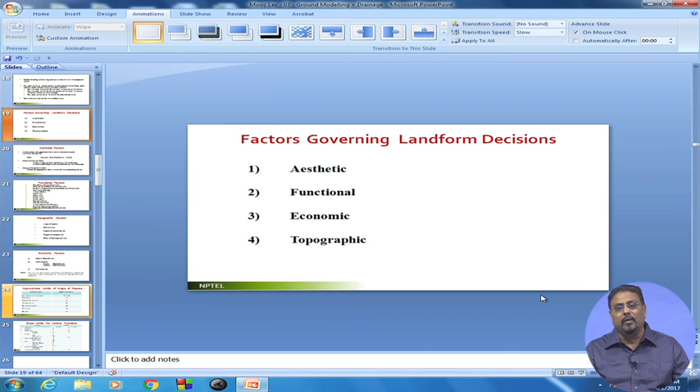First is the aesthetic, next is the functional, third is the economic, and fourth is the topographic. Here again I will put the note of cautioning that you don't try to prioritize which one is most important, which one is the first. But one thing is very true, that since it is landform and dealing with the soil, whether it is functionally good or bad, aesthetically good or bad, topographic matter will definitely be one of the prime concern.

And since landform means you are changing the profiles with the topographic factors, then naturally economic factor also will be very important. Very bluntly saying, you have a landscape project to be designed which has been commissioned by a client. It has some topography which you want to change. That means you want to do the landform work.

The moment you do that and you explain this pictorially to your client, he will be very happy. He will say, yes, wonderful, you please do that. And then you painstakingly work it out, estimate the earthwork, estimate the costing of it, and then you go to the client back and say that okay, it's going to cost you about say 30 lakhs. Client will say, dump it, don't do it, don't have to do anything. I cannot spend 30 lakhs just for changing my levels. This is the irony of these projects.

Okay, the point is, let us try to understand these factors very briefly. How you handle it and what will be your fate in front of your client, that the time will say. But let us think of it technically and also ideally. What is it? Which factors are going to govern when you are going to do the landform decisions? I have listed this in this form, so let me go by that form itself.

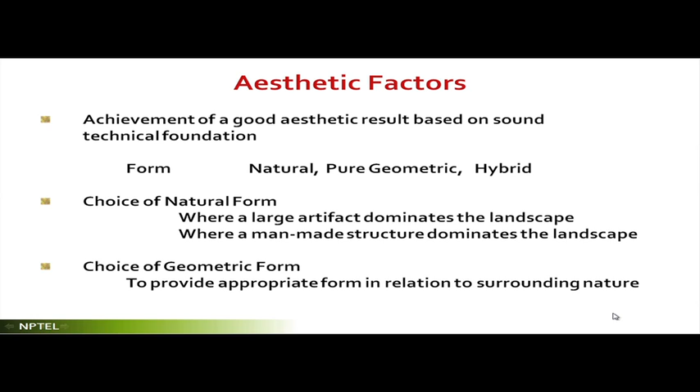Aesthetically, if you look at it, basically what happens is any landform work that you do, it must be based on a good aesthetic, based on sound technical foundation. It should be absolutely technically, geotechnically correct, whatever goodness it is we are going to give. So you are definitely, and also I can tell you, if something is technically perfect, it also is likely to be good looking, and this is phenomenally true for anything.

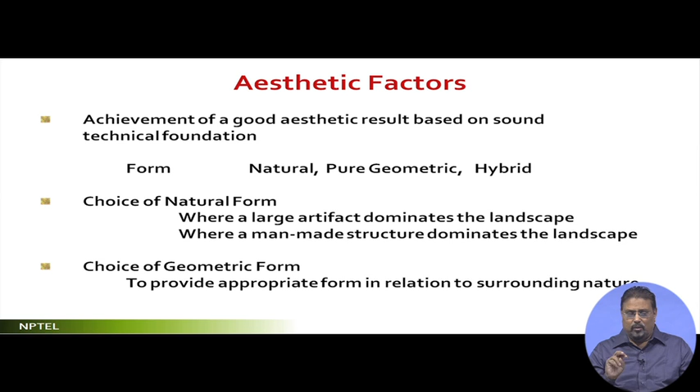Here actually in aesthetics what we are referring to is the form. There are three kinds of forms, two basic kinds. One is the natural form, that means the profile is curved. You know, whenever we try to explain, we say something which is curvilinear. These are natural forms. And something which is geometric, which you try to make it, which can be explained through geometry. This is geometric. Whether it is truncated pyramid, whether it is truncated sloped pyramid, whether it is a cone, whatever, which can be represented with geometry.

Now the question is, this one that I have drawn, which I am saying natural, can't this be geometrically explained? Yes, it could be, probably, because if suppose you make such geometric figure where it is absolutely paraboloid, half of the paraboloid, then it is geometric, no doubt about it. But the mind and the eye generally perceives this as non-geometric, so natural. And then if it is something like, if you make a pure paraboloid section over here, people will always understand, yes, this is geometric. The moment you round up this particular basis, then people will start thinking it's natural.

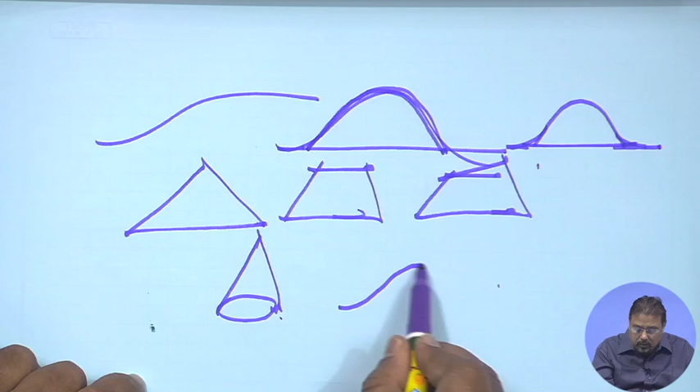So this natural and geometric, let's try to see with respect to perceptions. Some form, landform, which is very geometrically representable are geometric forms, and some forms which are maybe geometrically representable but perceptually it is profiled, then it will be natural. This is a point, let's stick to it. And there could be hybrid.

What is that hybrid? Is something like this. There may be a form which you have generated where you have gone like this, natural, and then straight down here, geometric. This is hybrid. Where do you see this? In nature has created this kind of thing. I can cite you an example. Nature creates this. You go to the sand dunes, go to the deserts. In the deserts you think that all the sand is something like this.

Go and see this - if this is the windward direction and this is the leeward direction, you will definitely find that the moment this sandbar increases in height, at one point of time it becomes a profile like this, what I have drawn. This becomes geometric. So the idea is that geometric or non-geometric, it's a matter of what you want in your project. It's a matter of choice, what you are choosing.

I can tell you one thing, that by phenomena, users are always very much fascinated by natural forms. They expect a natural form in the site. In the landscape, which is supposed to be a replication of nature to a great extent, the expectation of the user or the landscape connoisseur is to see more of natural forms. The moment you start making geometric forms, they try to correlate with the geometric forms of the buildings and other building elements. So it is your choice how you do it, but there are certain rules - or I won't say strongly that you must do this.

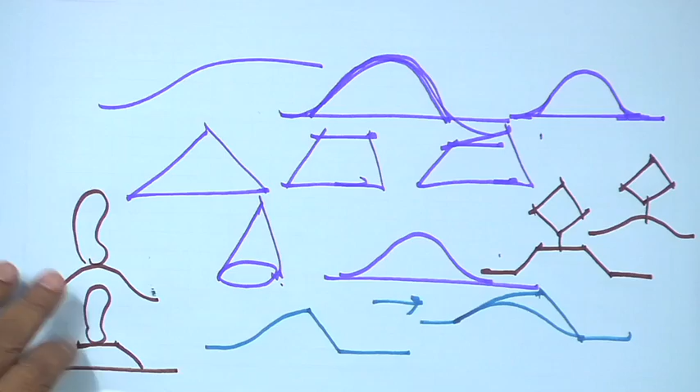...and you are trying to place it over a natural form, generally I won't say it's conflicting, but people would have preferred that accentuating this with another natural form is not very positive. So what is preferred is that you place it over a geometric form - it gets accentuated, it gets more focused. This is a very common thumb rule which you can use, now you decide. I won't say this is a very strong recommendation that you have to follow, but this is what we have understood from people's perception.

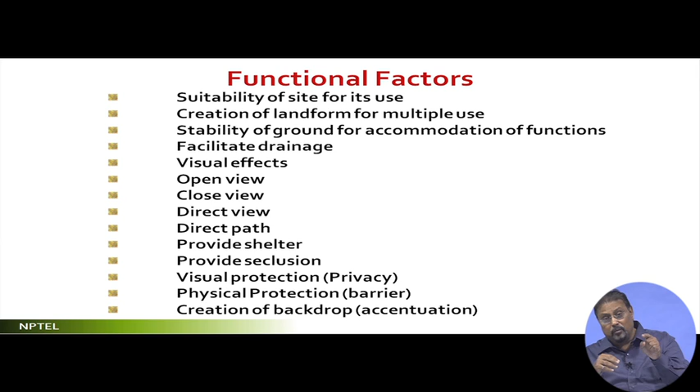The contrary to this is closing view. If suppose you have some site from where you have an unpleasant visibility to something which is not within your site, and you want to stop it, or maybe within your site but non-conducive from this particular side, then you make a mound to close it.

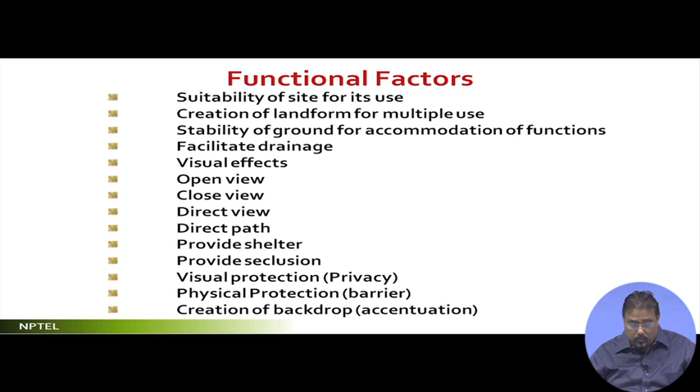Directing view is when you think in this term, drawing in plan. The mounds are, suppose you keep on making mounds like this, and now you put somebody at this particular point to view it and try to see what will happen.

The person who is seeing this in plan will see the projected surface of this and this, and also the projected surface of this. The moment it is generated in the image of the person, automatically the whole view is being directed by obstruction of this. So if I try to take a test of people on their perception, they will say that when they were looking at it, the whole thing appeared to be directed towards this. So this is directing view.

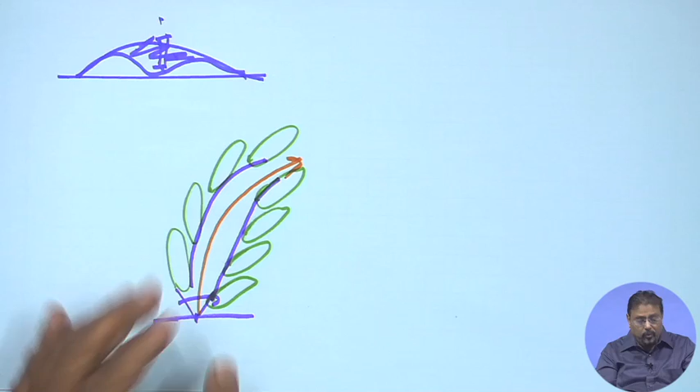Now take the same thing for directing path. Here, the moment you find that the mounds are turning like this and this, and the other mounds are turning like this and this, automatically you will conceive or perceive that there must be a path leading to this. So directing path, directing views, closing views, and open views are all functional aspects of the landform.

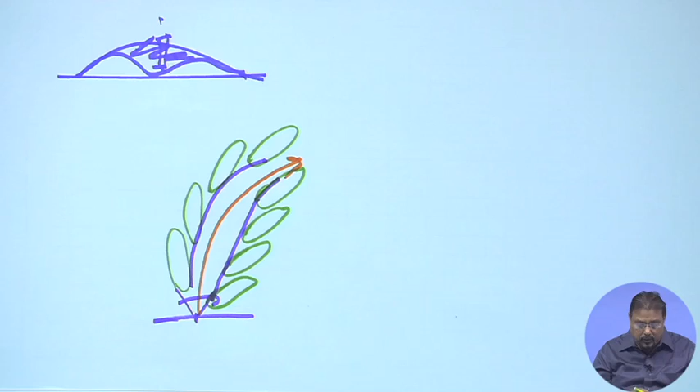Provide shelter is essentially this. I will try to cite in another way. What happens is, if somebody is standing here with nothing around, he has to have a feeling of shelter. The best possible way is to have something above - remember the behavioral things I was talking about. If this is not possible, then something on the side.

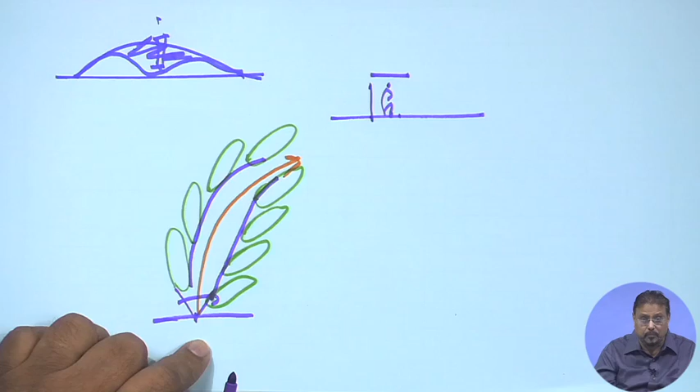If this is not possible, maybe a mound. This will work, this will give a feeling of shelter - that means I have a shelter to fall back on, but actually it is sloping upward. Still the mind perceives it like that, remembering the sensation, perception and intellection process in which the user perceives this as one form of shelter.

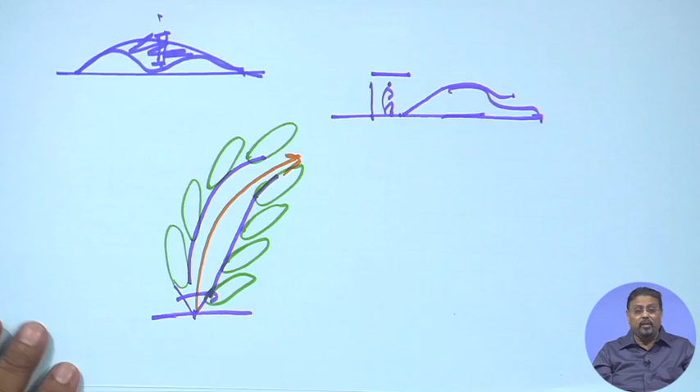Then provide seclusion. When you have one function here, another function here, and you want to make a separation between them, you can always create a mound in between to seclude simply. So these are all different functional aspects of it.

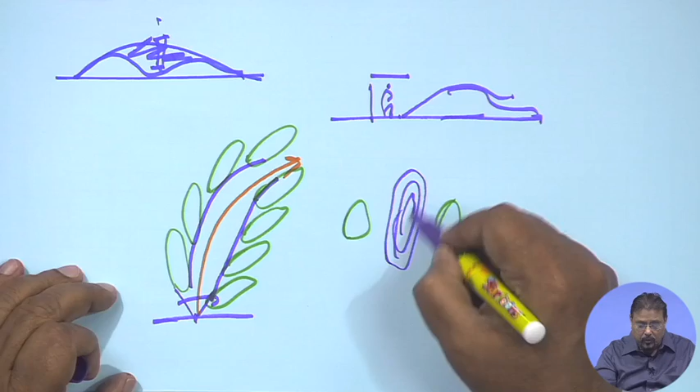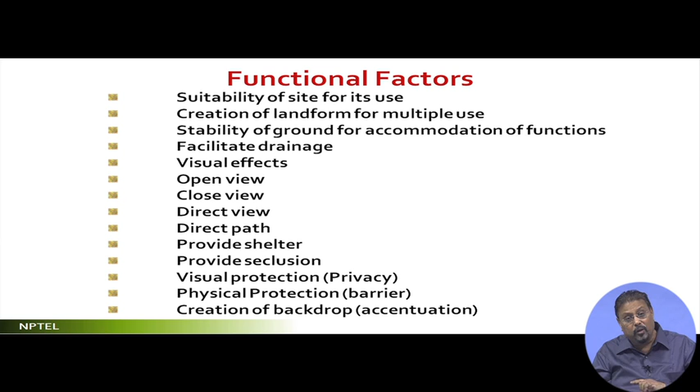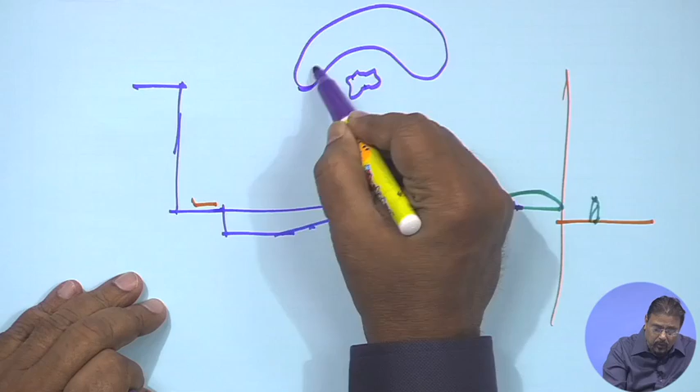Physical protection as a barrier means you are now making the mounds as a barrier, so that you cannot cross over. And creation of the backdrop, which is something like this, when you have some objects over here which you want to highlight with the mounds. I am always citing this landform as mounds here because that will be best perceived like this.

With this, the moment you look at it in a view frame, you will find that this is the object and then there is a mound at the back. This gives you a kind of backdrop which accentuates. This is how you have to look at it in terms of the functional factors. And once you understand this, you can always also start analyzing different examples that you are seeing yourself around you, which I am not being able to see. So you try to correlate this with respect to that.

Next is the topographical factors, in which few things are very, very important. One is the angle of repose. Angle of repose is the angle that is being generated between, suppose, the best way to understand this, if this is ground and you pour the bulk material, the loose material, you keep on pouring. Once you start pouring, you will find that this is going to take a shape of a similar kind of geometry. And if it is loose materials, by virtue of the size, volume and the profiles of this, automatically there is a generic angle that is created, and this is the angle which is the angle of repose.

The best way to understand this is, have you seen the sand clock? In a sand clock, you will find that from the top ball the sand is falling in a line and it makes a sort of cone at the center, and you measure the angle between the horizon and this, and turn the clock and see again, it is again making a cone, measure, it will be identical, and this is a phenomenon. So why you have to understand angle of repose here: because in case you are using bulk materials or loose materials, the angle of repose will be very much active, very much required.

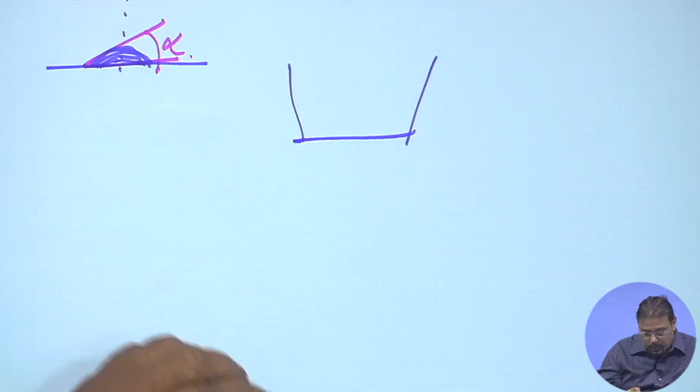Then degree of consolidation and compaction. These two I always discuss together for one reason. The degree of consolidation is basically a natural process of consolidation. You remember that I said the composition of the soil, which has the water, air and all. So in case you have the soil, let me take a bucket within which let me put some soil. Okay, loose soil, just pour the soil, it is filling it up here. Let us take the organic component, that 5%, as an integral part of the entire mineral. So I have three things now here: the mineral component, the air and the water.

Okay, now you allow it to be consolidated by its own self weight. Now this will have water and also air. Water is trying to replace the air. So once the water is trying to replace and doesn't get any egress out, this air will be trying to come to the upper level, and then after some time it will just come out. And another thing is, suppose you give heat to this, and you will find that this heat is heating this particular surface, and by conduction this heat is ultimately transmitted to the end, then the air in between the air spaces also will come out, and also the water will evaporate.

So when this thing is happening, the water and air is trying to escape from this. And secondly is the self weight of this particular material, one layer over the other. So the first layer, second layer, third layer, if you start putting, I am showing you into a basket, but in the real scenario it is naturally being done. First layer you put, it will leave it for one season, the rainwater will fall on this, and the air temperature or the solar radiation will evaporate the water.

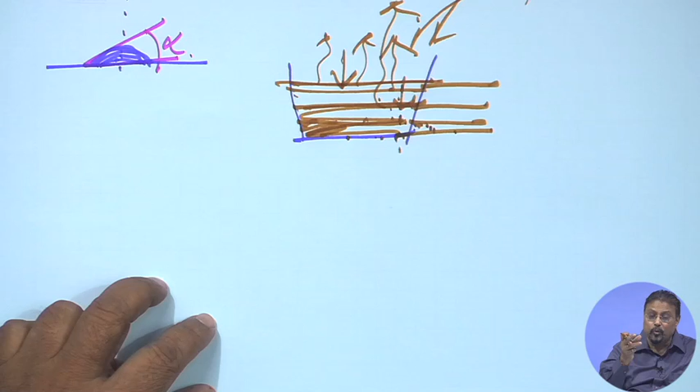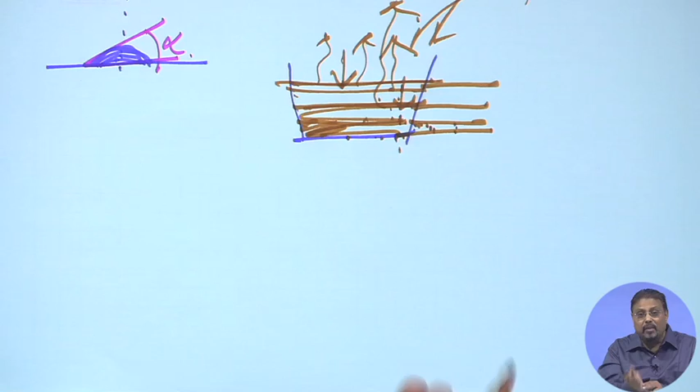And once the water is evaporated, then the air spaces are there, air voids which are being created now will be displaced with the higher heavy particles above, and that particle will now displace all these things. And once the particle is displacing, the air is coming out, so it is now filling up all those interspaces naturally in the natural process. Then when you are putting the next layer, the same process is happening over this.

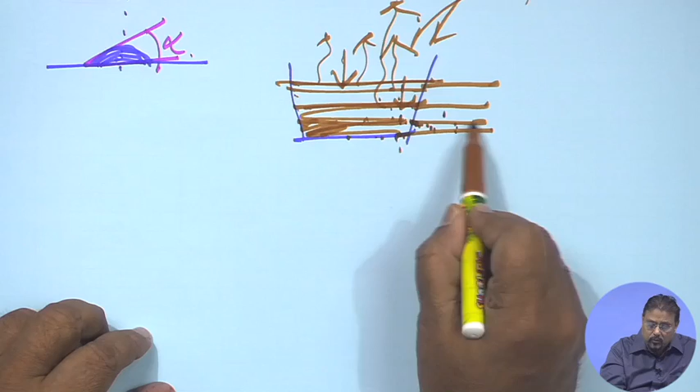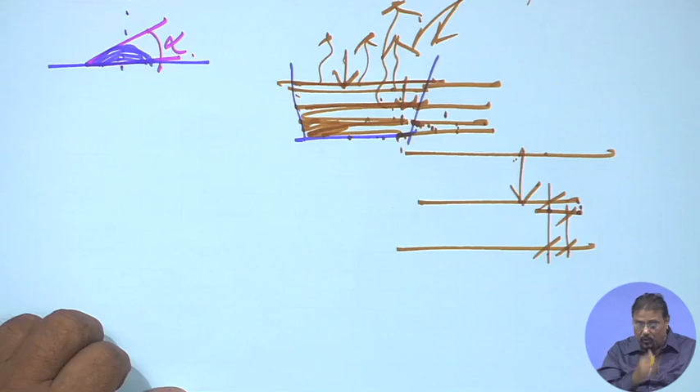If suppose originally you have found that this particular layer was of this depth, and if you could measure, then when you are putting the next layer you will find that the depth probably will be reducing a little bit. Now this is the displacement which will take place because of the additional weight that is coming over here, because this is no longer susceptible to any kind of evaporation of the water, because that has happened already. Now this weight is going to reduce here.

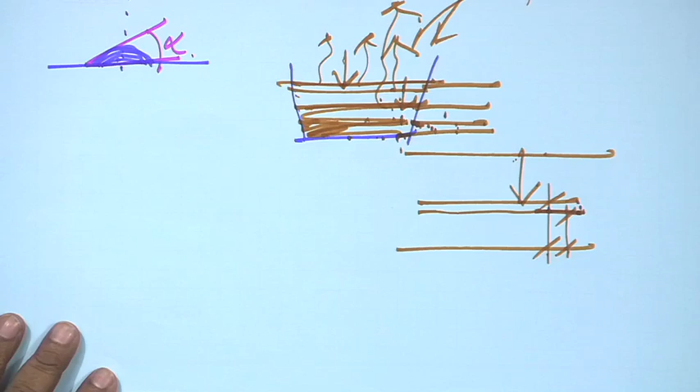So what happens is, if you are working in the profession, you must have seen that when you take earth fill or sand fill or such kind of filling, you try to measure the volume in its consolidated position. If you take the volume in the loose position, then you are a loser, because you want to fill up this much, and from the supplier you got so much of volume, and by consolidation this is going to reduce, so you could not match the volume that is to be consolidated, so you are a loser.

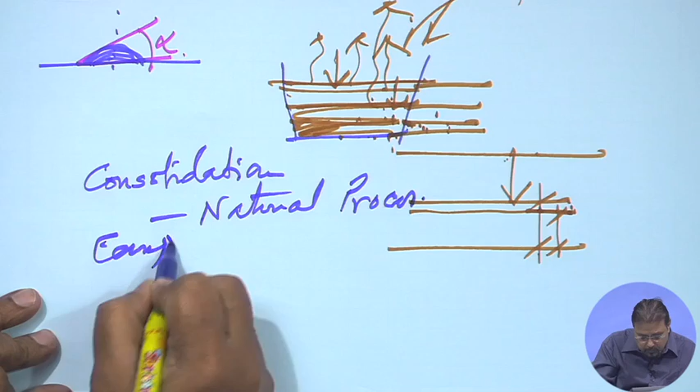So at that point you always consider the height or the volume when it is in the consolidated form. So now let me just very categorically differentiate between these two. Consolidation is a natural process. Never forget, consolidation is a natural process. And what is then compaction? Compaction is a mechanical process.

Here what is happening is you are trying to put pressure on this particular soil with some external devices, whether it is by bulldozer, or by steamroller, or by diesel roller or something like that. That means you are trying to put pressure with the usual handheld tamping gadget. There is something like this. You must have seen this kind of tamping gadget. You have to keep on pressing.

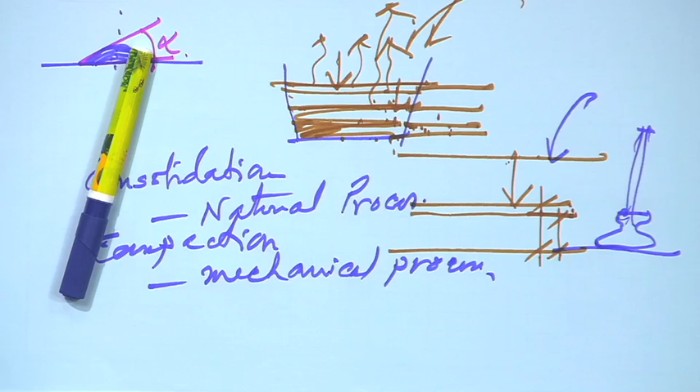Basically what you are doing is you are putting pressure on the upper layer, and the upper layer is now putting pressure on the lower layer, and in between the air spaces and the water spaces are now being replaced with the small granules, and air and water is escaping. At one point of time, if this was the original layer, by tamping or by rolling, this comes to be the finished layer, and by then this has reached a compaction level.

And there are measurements. There's something called the Proctor compaction test. By this Proctor compaction test, you can measure. After you do this with mechanical devices, you take a sample soil and see what compaction level you have received, and if it is about say 95% or plus, then you become very happy. Okay, this is a good compacted soil. And if you find it is lesser than that, then you must know that your mechanical devices did not work properly, or it has not been done very seriously.

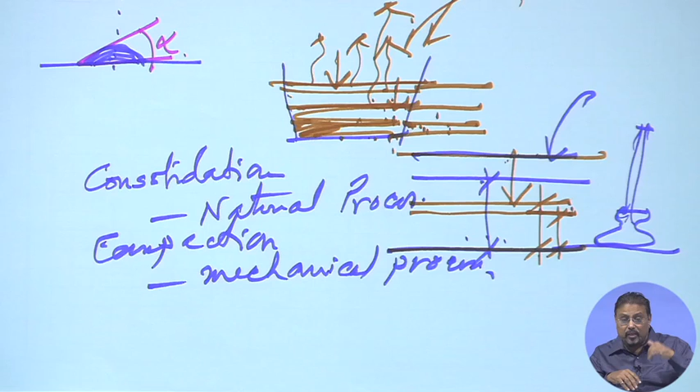So I can also tell you one thing: in the compaction process, very quickly you can always achieve your compaction to the desired level. But the consolidation process takes time, because you are leaving it to nature, the rainfall, the sunrise, sunset, the solar incidence, rain incidences, all these matter. So here, two things to be noticed. In consolidation, you will find it's a natural process, so it takes a long time.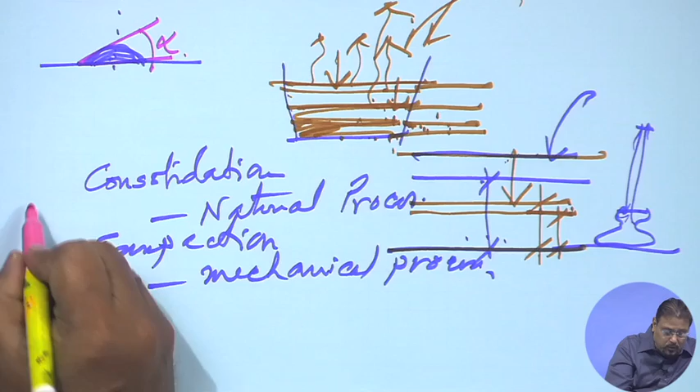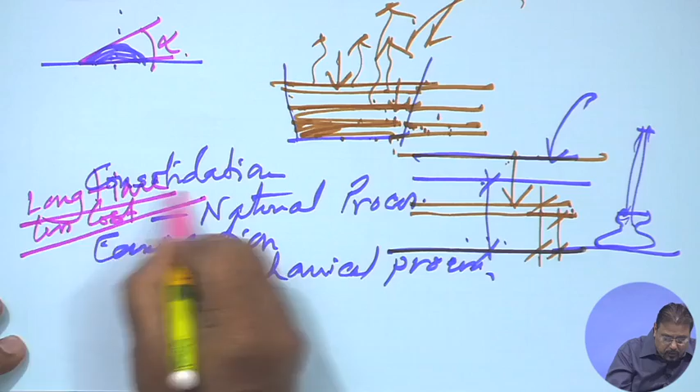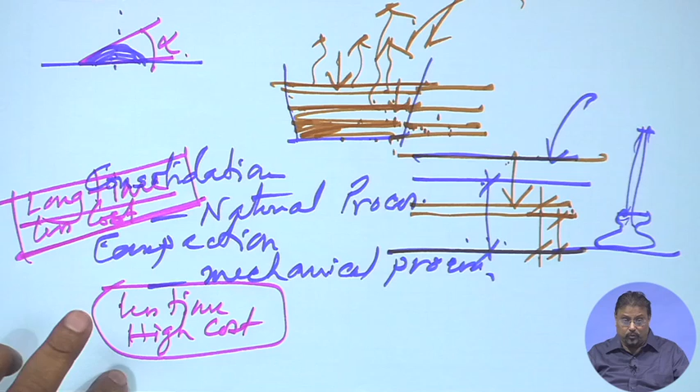And since you are not using mechanical devices, the cost is less. That is for the consolidation. In compaction, it takes less time but high cost. Now these two are contradictory, isn't it? But still you have to take a call. Would you like to go for this or like to go for this? Now let me give an argument based on which you will decide.

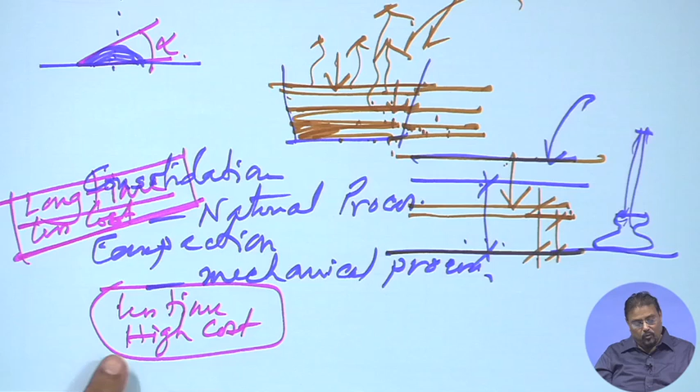Suppose the project has to be commissioned very fast, you don't care for the cost because the cost will be recovered from the clients, then you go for compaction. Quickly do it, compact it and sell it off or set it off. In such cases, you use less time, even if high cost, but the higher return will be coming, whether in terms of revenue or in terms of utility.

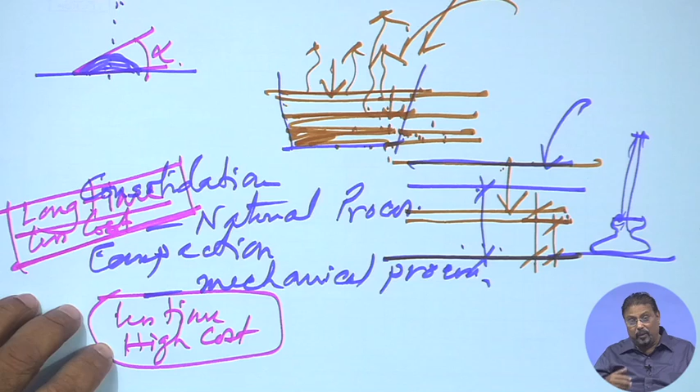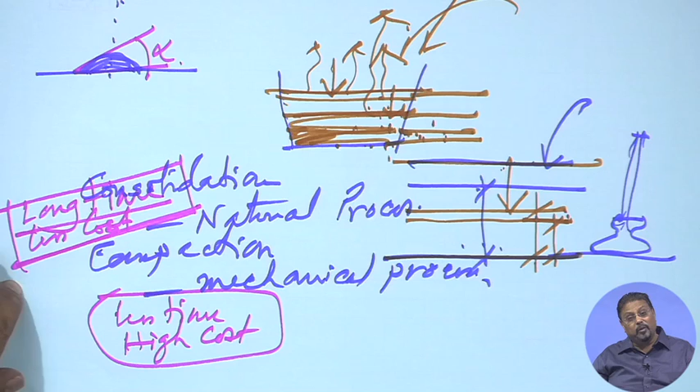Another thing, when you go for such kind of compaction, if it is too large a domain to compact, then it becomes really cost ineffective. If it is a very large area to be compacted or consolidated, it is always better to go for consolidation. It is because of this that for road embankments, rail embankments, wherever new rail routes or new roads or highways are being constructed, generally they prefer consolidation.

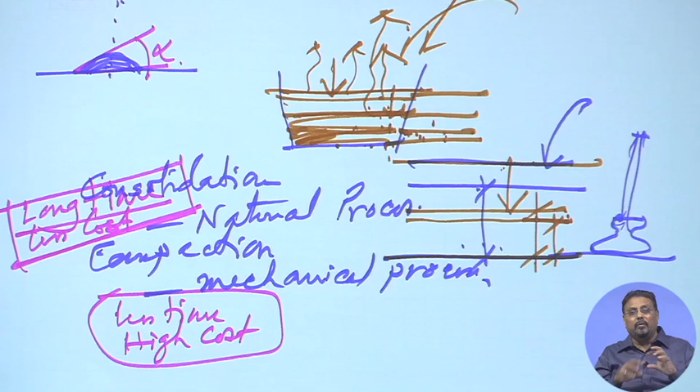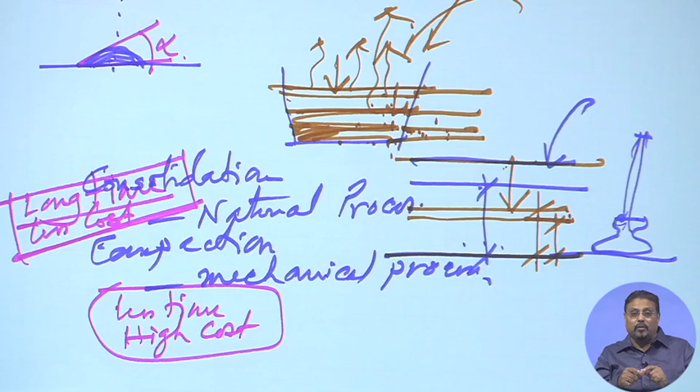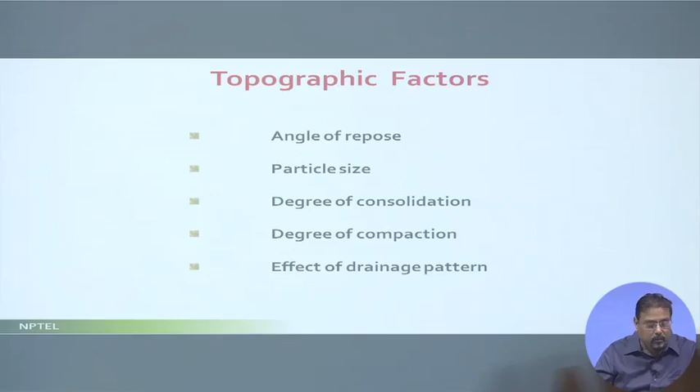What they do is, let's mix it up. For such larger chunks you go for consolidation, so wait for that time. But when it comes to a certain level which is consolidated enough in terms of strength, then for the top layer you go for compaction. So it is not necessary that if you follow consolidation, you have to go for consolidation till the end. No. So this is how you really work it out. What is the degree of consolidation, what is the degree of compaction that is required? That is going to be your guiding factor. And also the effect of drainage pattern.

Effect of drainage pattern is like, suppose you have the soil and the topographic factor is it has certain slopes and the drainage is passing over this, then it definitely will be subjected to two things. One is the superficial water erosion, another is the under surface creeping erosion. Creeping erosion is basically destability.

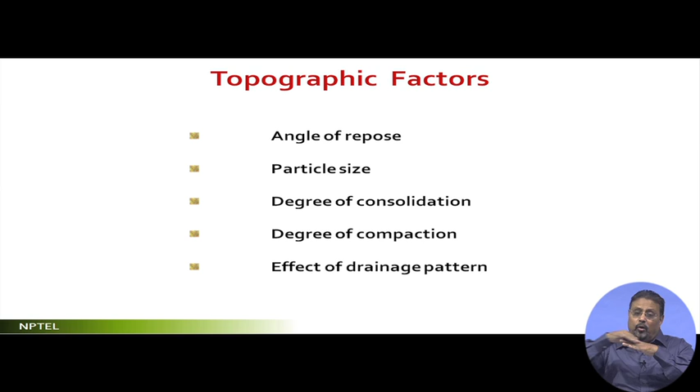This is what I was citing in our Sikkim cases, where the maximum landslides you find are where the slope is such that the water is coming in and ultimately destabilizing the undersurface of the soil. The top surface is not the one that slides or glides; the top portion is not destabilized by the water flowing over it, but the lower portion has got destabilized, and once this gets destabilized, the whole bulk at the top rolls out. This is how the whole thing happens.

So, topographic factors you take into consideration, and then there is the economic factor. This is very critical, because at the end, whatever you do, it costs. There are three things to be seen. One is the capital expenditure, the first expenditure that you are going to do, and there is maintenance expenditure, and in the maintenance expenditure there is a direct expenditure. When you make the landform, you incur the capital expenditure, but to keep it retained in the shape or profile that you wanted, you have to do some maintenance work every year. So that direct maintenance is going to be an expenditure.

But what is very important is to also notice if there is any indirect expenditure that you are incurring or compelling them to have. What is that indirect expenditure? Let me explain. Suppose you have made a mound of a certain slope, and the slope has to be maintained. To maintain this, what you could originally have achieved with a machine, now you are not able to. So you have to have more manpower, and that you are incurring mainly because of the inconvenience created by this slope. So the indirect expenditure is connected with the inconvenience you have created by changing the profile, and this cannot be disregarded.

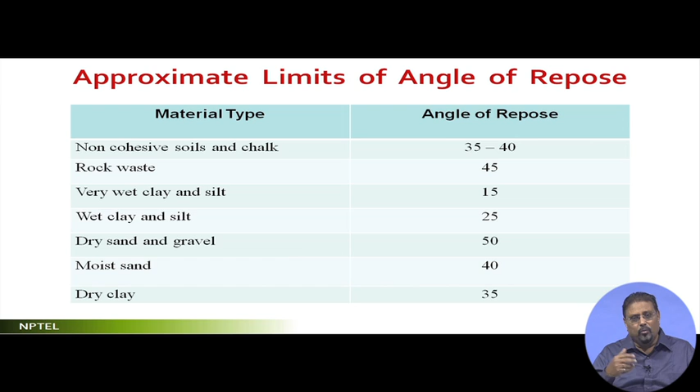Here I will just keep this slide for a few seconds, just to give an idea. The different materials used for landform works are of this kind: non-cohesive soils or chalks, rock waste, very wet clay and silt, wet clay and silt, dry sand and gravel, moist sand and dry clay, and they have their standard angles of repose which are less variable. I am keeping this slide for a few seconds so that you read it, reread it and try to understand it, but I am not going to discuss it.

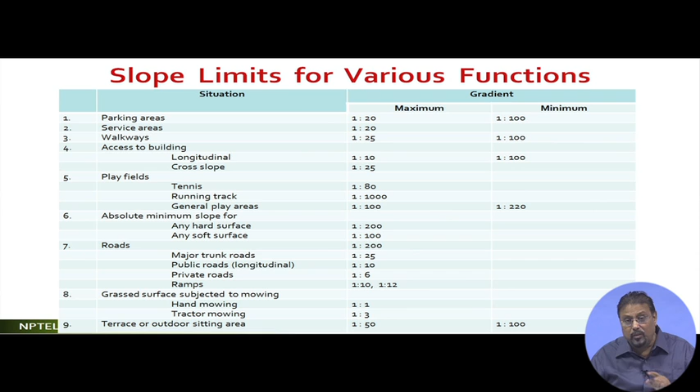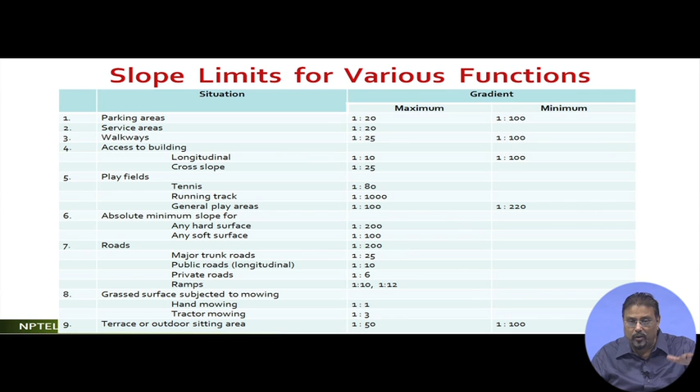How you use it: you can extend this list from other references as well; I am just giving an idea. You take a list of functions that you want to accommodate within your site, find out their minimum and maximum desirable slopes, and when placing them, check whether they match the slopes where you are placing them, based on the preliminary or prima facie placement of functions already done in your slope analysis.

Now you make a few modifications in local areas, and then ultimately decide the levels you are going to give. This is how you will see that landform design is becoming so very technical and constructive, because ultimately you have to instruct the contractor the way you want it. I will discuss this a little further in my next lecture.